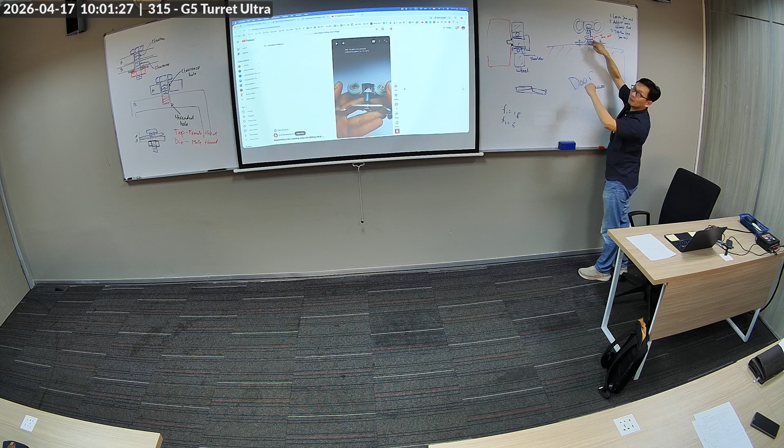So the jam nut actually presses the threaded bolt into the bracket, so it's now locked. So the purpose of a jam nut, and this is the reason it's thin, is to tighten itself against something else.

So the main thread does not rotate anymore. So if you only adjust the height of your door and it lifts up, but you don't jam it with the jam nut, over time, things moving, things rotating, it drops again. So in order to stay on the height that you want, you have to jam it with this jam nut. That's kind of a long explanation for the jam nut, but that's what it is.

Nylon insert jam nut. So again, you put the nylon here. It's tight, more difficult to rotate, intentionally so, because they put a plastic piece.

Wing nut, you can just use your fingers, no tools. Cap nut is just something aesthetic because the threaded rod usually sticks out, and if it's on the outside of your product, you want it capped. Something similar like a cap nut.

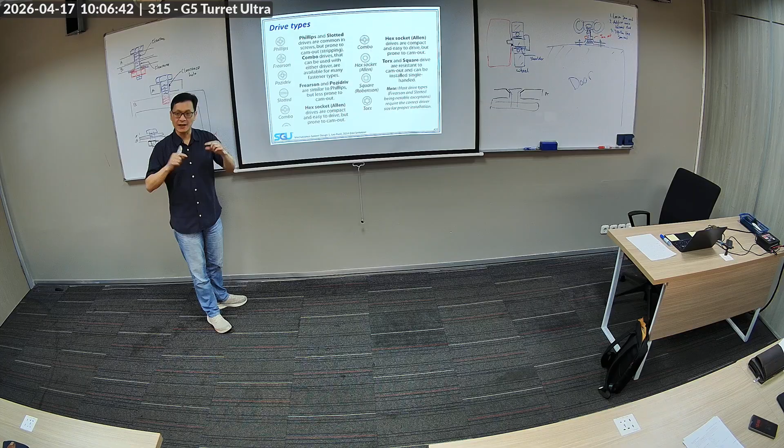Combo. Now, these are a bit special, and you see this in tiny, tiny screws — we're talking like M2 or 2mm screws or even 1mm screws. What's special about them is they are resistant to coming out. Because if you see a Phillips head, if you cut through a Phillips head, it is actually — say if this is a screw, okay, that kind of screw.

The Phillips head is actually cut at an angle. So as a result, when you tighten it with a lot of torque, your screwdriver will pop out, and this head will be damaged. It will be rounded.

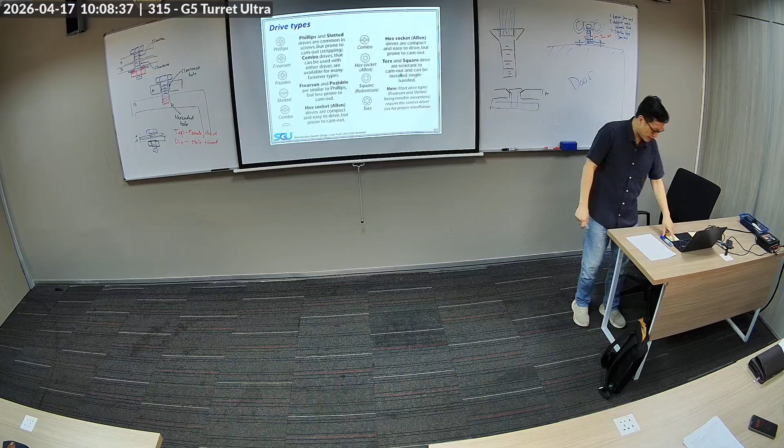You have a question? Yeah, why do they make a Phillips that's straight cut instead of this? That's a good question. I mean, tradition—that's how we've been doing it, and that's the cheapest screws out there.

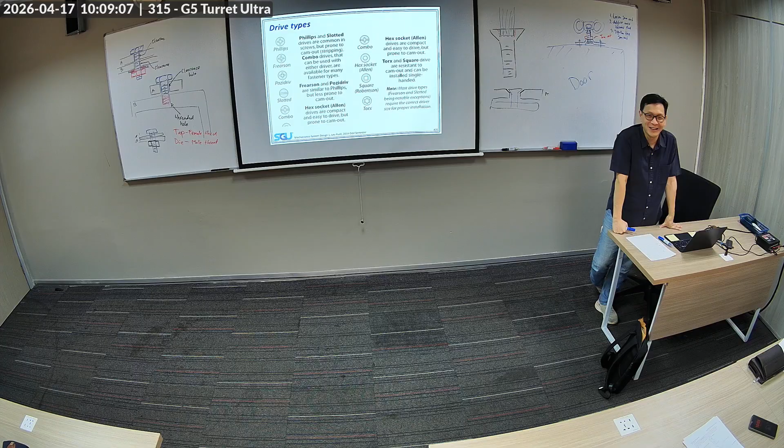These are newer, and when they say newer, we're talking about 10, 20 years. This goes back like 50 years. So it's just tradition. If you deal with German cars, they do this a lot—Torx. I hate it because you don't use common tools, but it is better. You have a lot of surface to bite on, so yeah, more expensive fasteners. Just tradition, that's how we've been doing it for decades, so we'll just use that.

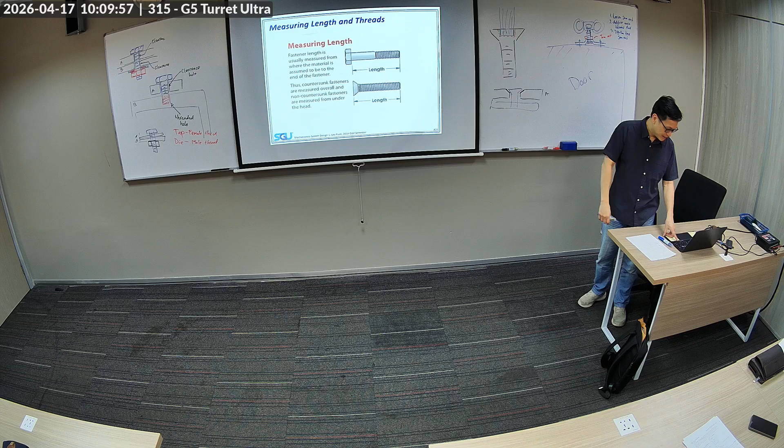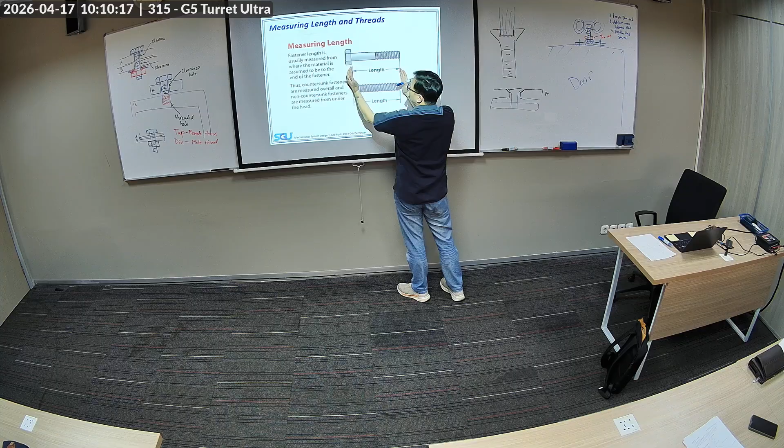The definitions of length for fasteners is different if you have a head sticking out or the head is in. So for countersunk fasteners, this is the length. The bolt with a head like this is the length.

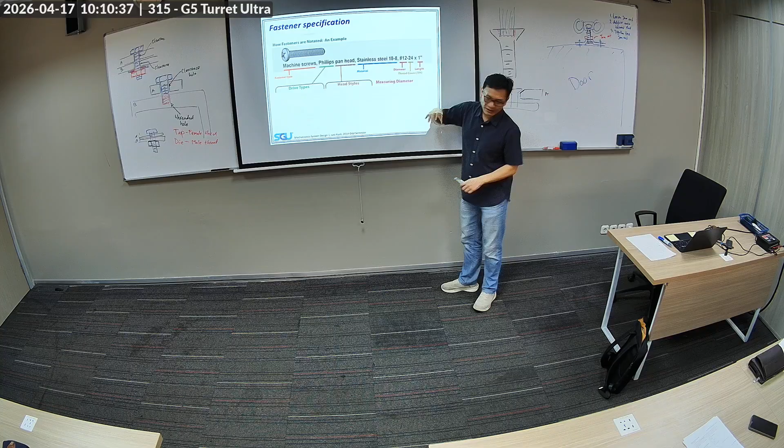Now let's talk about how they are defined. This is an inch thread. I think I have a different slide for this—hold on. Okay, we'll get to the sizes.

But before that, coatings. We have coatings on bolts to do several things. First, appearance, so it doesn't rust, and corrosion—corrosion and appearance kind of go hand in hand, right? A rusted bolt just looks ugly. It also reduces friction, and this coating helps with friction too. If you have less friction, you have less preload scatter, and we'll talk about preload a little bit later.

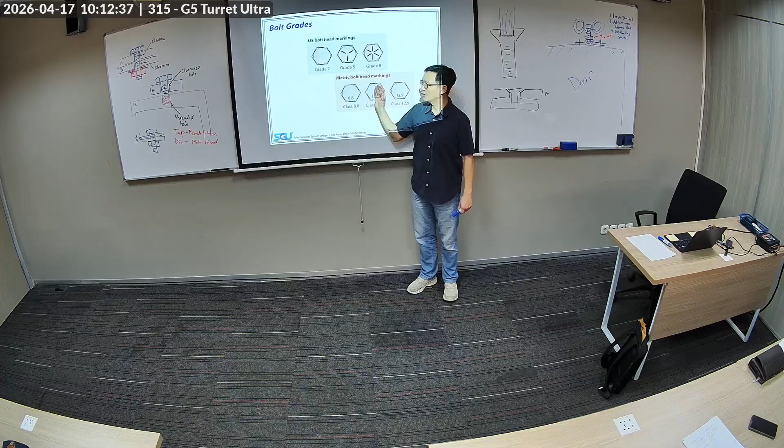Now, if you look at a bolt, you've got multiple threads engaged, right? But actually the load is not carried on the threads equally. So these are the load percentages of each thread: 34%, 23%, 16%. What's that total? 60-something, so 73%. That's the load actually carried by the first 3 threads.

So if these are multiple threads engaged here, the first 3 threads that are engaged are carrying 75% of the load. And so if you ever over-torque a bolt and strip the thread, you'll notice that the thread that's stripped is not the bottom—it's actually the one on top, because the top 3 threads carry the majority of the load. So that's the first consequence.

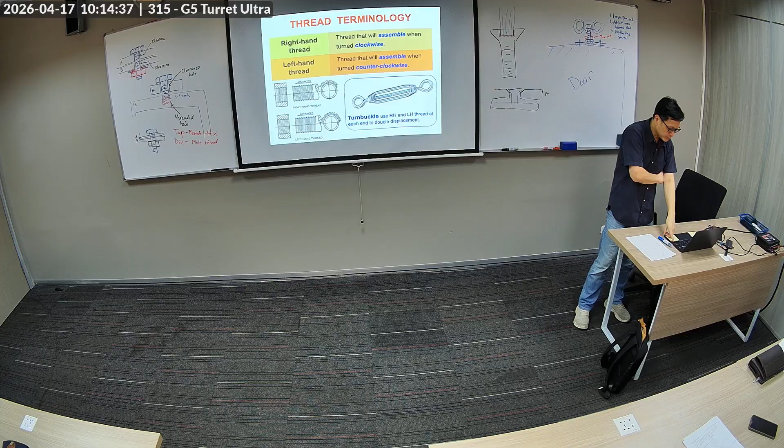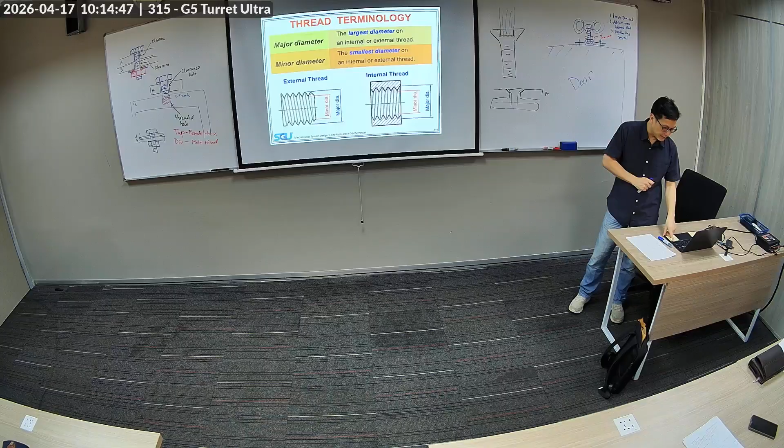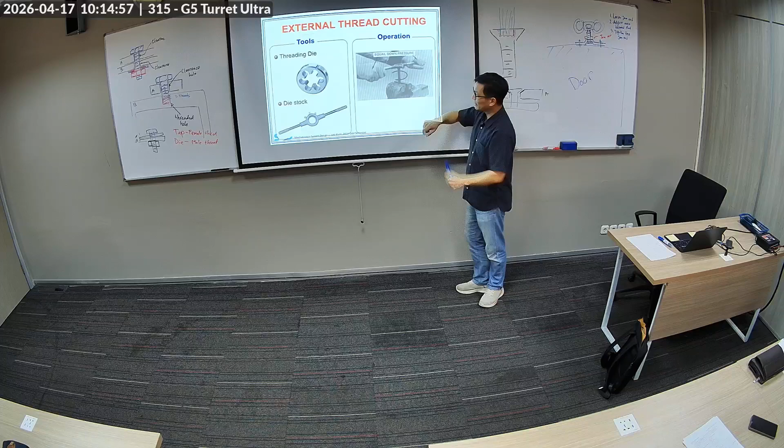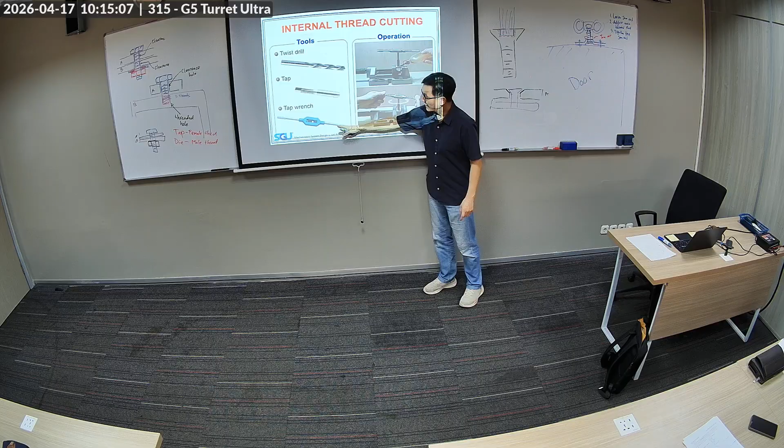These are the tools. This is the tap, you know, you tap it. This is a tap wrench. So first you drill, and then you tap to create the female thread.

The way you check a thread is using what is called a thread gauge. You want to check the dimension of the thread. Basically you fit the thread gauge into the threads and see which one matches.

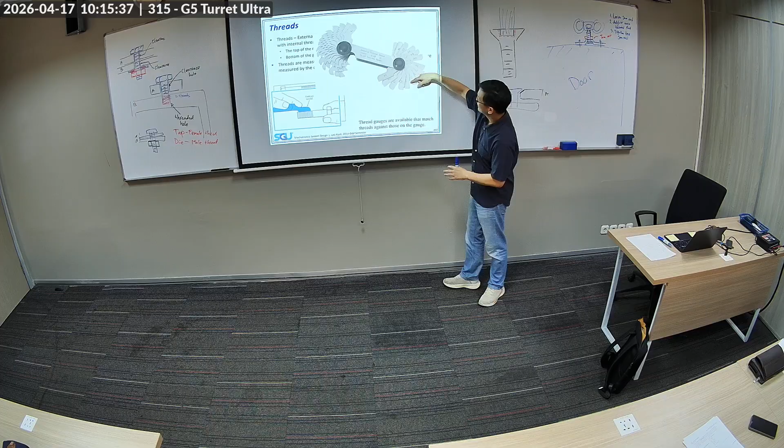This thread gauge is just a bunch of thread marks, thread cuts. So it's like that, and then you try to match it and see which one matches. I'll bring you some samples tomorrow or the next time I remember.

This is how you define a thread. The nominal size is the major diameter. So you have a bolt, right? You have these threads. The major diameter is this.

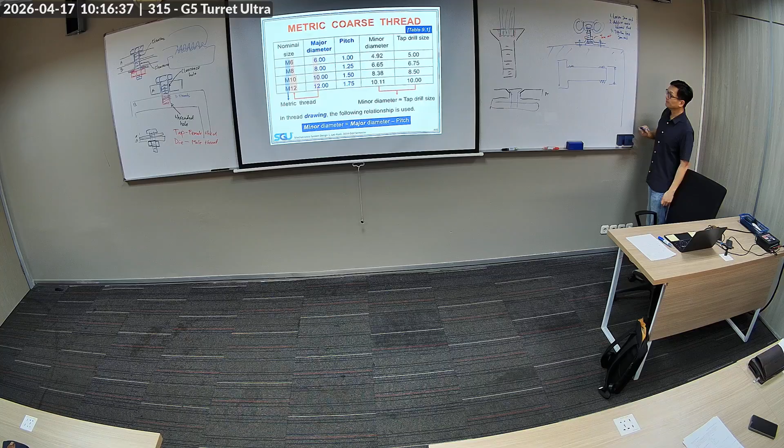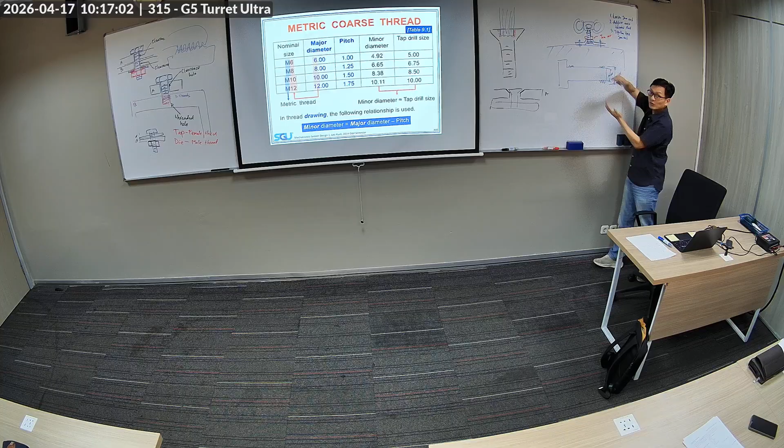On the outside of the thread, because you have the inside, right, the cut - this is called the minor diameter. This is the major diameter. So the minor diameter is the root. The major diameter is on the crest, which is the top of the mountain. The minor diameter you measure at the bottom of the mountain. The pitch is the distance between these two crests. So this is called the pitch.

So the smaller the pitch, the finer the thread. Lebih halus, right? It's fine. Obviously, a smaller screw will have a smaller pitch. It's just natural. So that's the pitch. For the same major diameter, you can have coarse or fine.

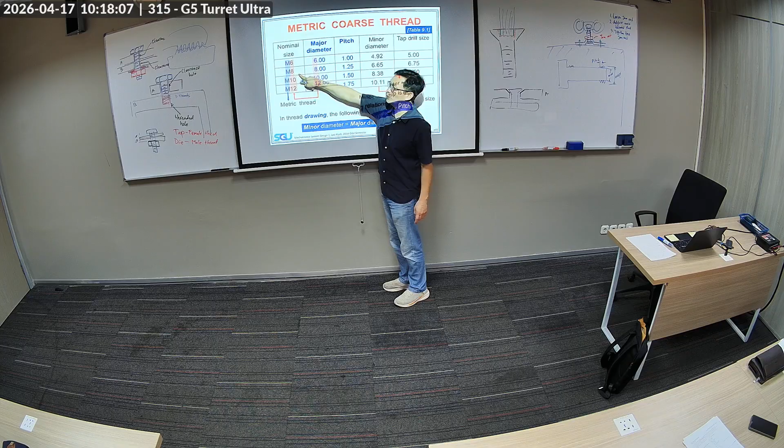So this is a coarse thread. An M6, a 6 millimeter screw, will have 1 millimeter pitch for coarse thread. Let's look at M8. An 8 millimeter screw or bolt has a 1.25 millimeter pitch for the coarse, but for the fine, an 8 millimeter screw or bolt will have a pitch of 1 or 0.75. So it's tighter together.

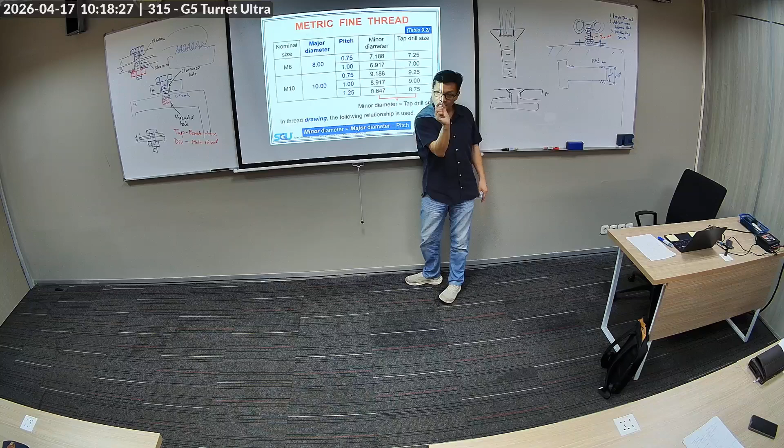Same major diameter, but one is finer, the other one is coarse. So coarse is like they space apart. This is the fine one.

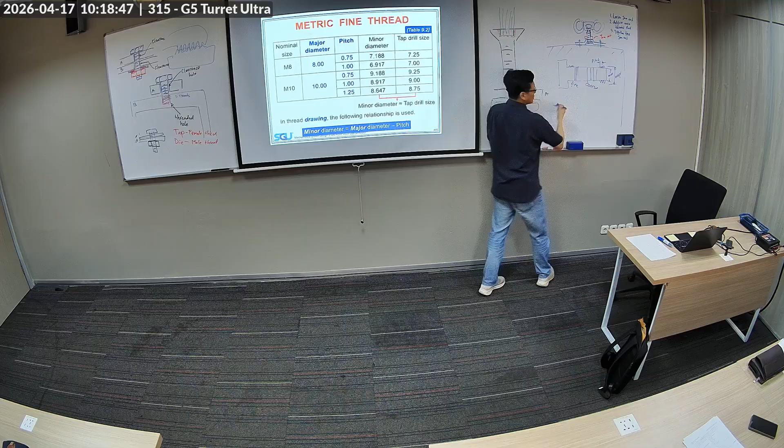So you actually have two types of thread specification. One is an inch style or inch unit, and the other is the metric unit. So with an inch unit, the writing is different. Here we deal mostly with metric, but I think you also need to know how an inch bolt is specified.

A metric bolt is specified M6-1. This is the thread pitch, this is the major diameter. For an inch bolt, quarter inch, 20 - now what is this 20? It's the number of threads per inch. It's different from the metric bolt.

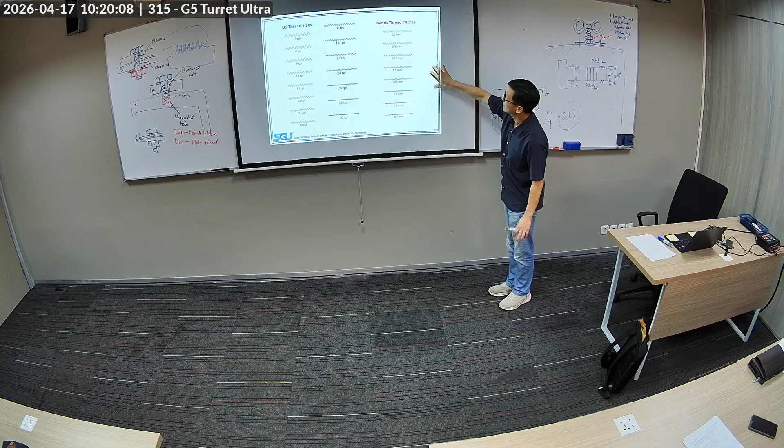So this is an image of the threads, right? Metric thread pitch is the distance between the two mountains. So a metric pitch is defined like this - if it's 1 millimeter, then it's 1.0 millimeter distance from the two peaks of the mountain.

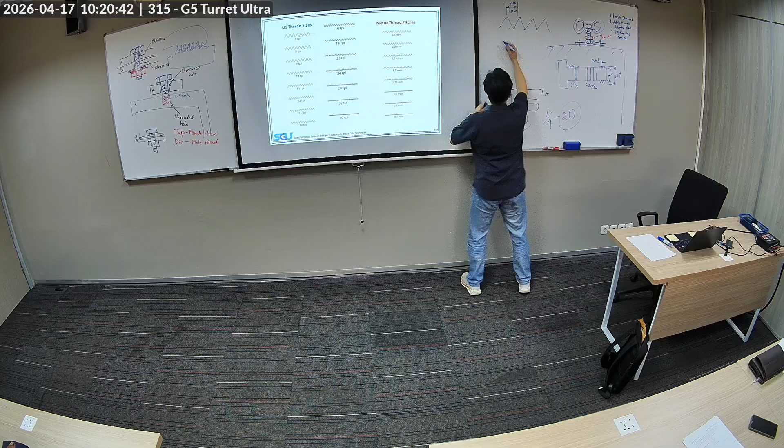But a US bolt, an inch bolt, is specified in terms of threads per inch - in 1 inch, how many threads are there. So a 20 TPI means that if you take a bolt like that and measure in 1 inch, you have 20 threads.

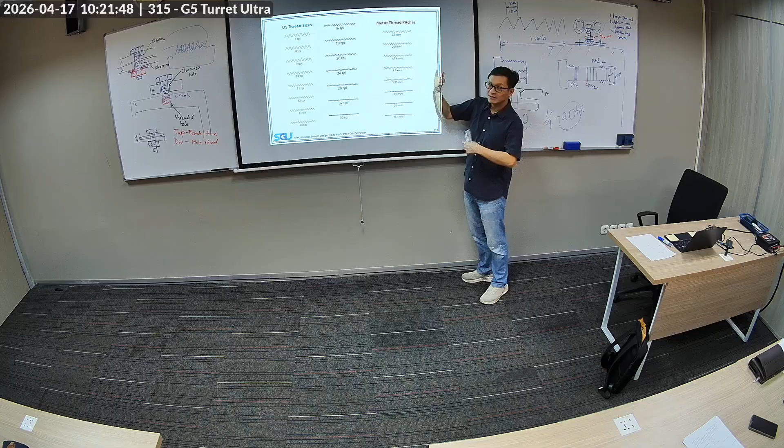So which one will be a finer thread between 20 and 24? The bigger the number, the finer it is - lebih halus, right - because there are more threads per inch. But in a metric thread, the bigger the number is the coarser, or put differently, the finer thread has a smaller number, because it is measuring the pitch, not the number of threads in 1 inch or a specified length. Got that? Okay, so it's the opposite and it's written differently.

So the letter M signifies that it's a metric thread. 6 is the major diameter and 1 is the pitch. For an inch bolt, quarter inch is the major diameter and 20 is the number of threads per inch. So a metric bolt is like this, M12, 1.75 - this is the pitch. You don't have to remember the rest. This is the majority of the thread specification.

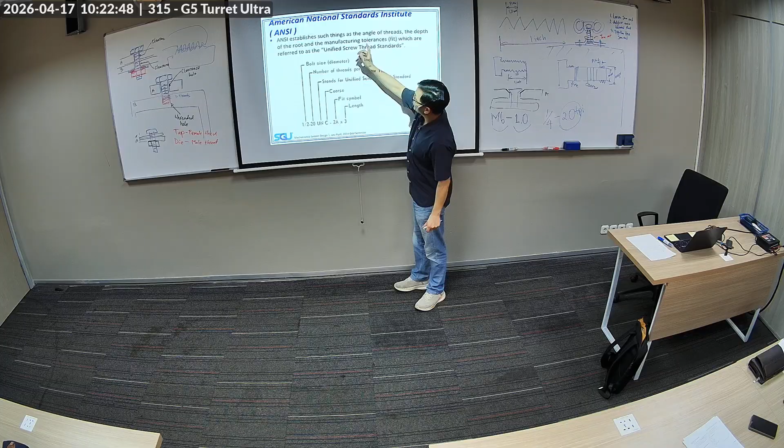A US bolt for ANSI is half inch, 20 threads per inch. And you cannot find random thread specifications, right?

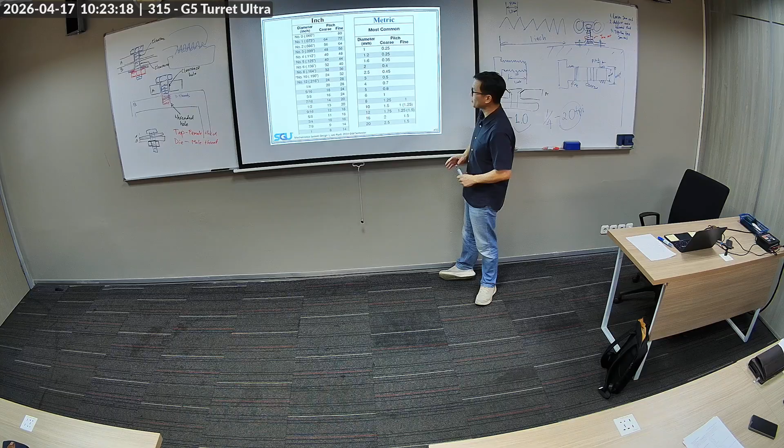So a 6 millimeter bolt is most commonly 1 millimeter pitch. You cannot say, I want a 0.9 pitch, okay? It doesn't exist. They make this in mass production, so you've got standard ones.

Now, the smaller bolts do not come in fine pitches, only the bigger ones. So starting from 8 millimeter, you will have a fine thread version of the bolt.

All right, we'll get into the calculation for the strength of the bolt.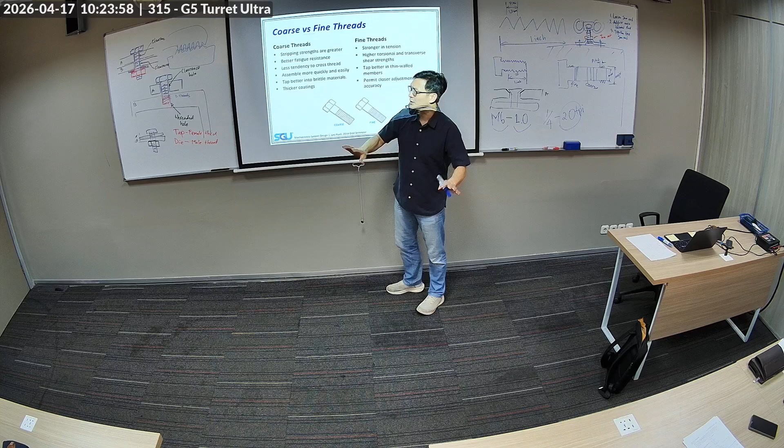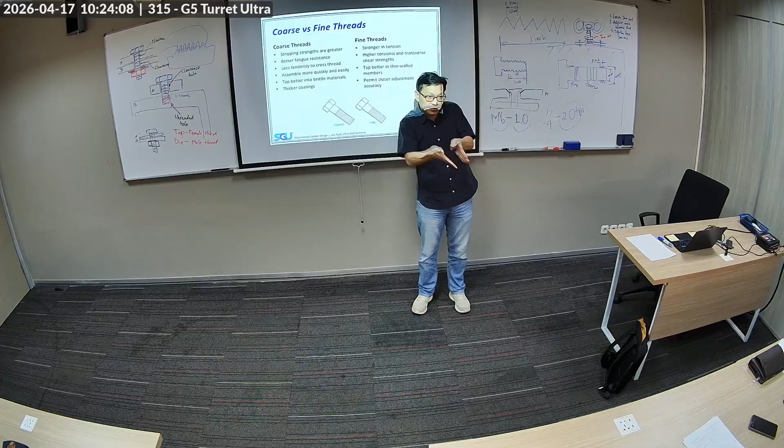Let me just summarize between coarse and fine. There are different strengths and weaknesses. The coarse thread is the most common, so in most cases you'll be using coarse thread. It has greater stripping strength, better fatigue resistance, and less tendency to cross-thread. Cross-threading means when you insert a bolt at an angle and tighten it wrong, you damage everything - I've done that. With fine pitch, you can cross-thread more often.

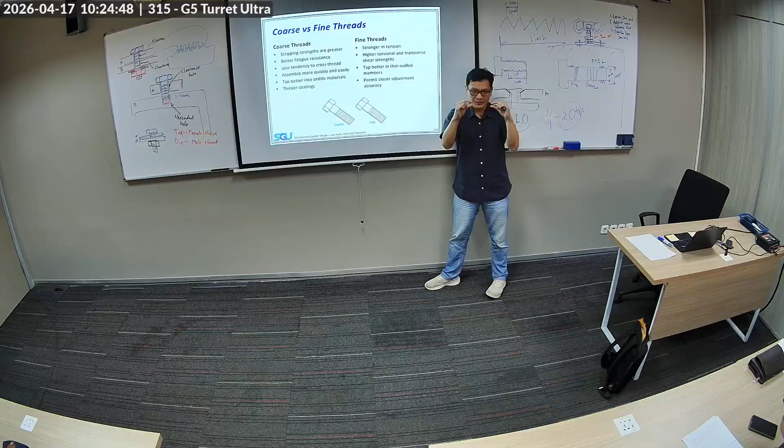Coarse threads assemble quickly and tap better into brittle materials - so these are the main strengths. Fine threads sometimes are used because they are stronger, with higher torsional and transverse shear strength, and are better in thin wall members. This is the main reason you use fine threads: when your plate is thin, you don't have room for many threads. If your plate is thin, that's why you use fine thread, so you can fit at least 2 to 3 full circles in the specified thickness.

It is mainly used for adjustment - sometimes you use these bolts for adjusting a distance, like the tensioner in a belt situation. So that's probably the reason you will use fine thread.

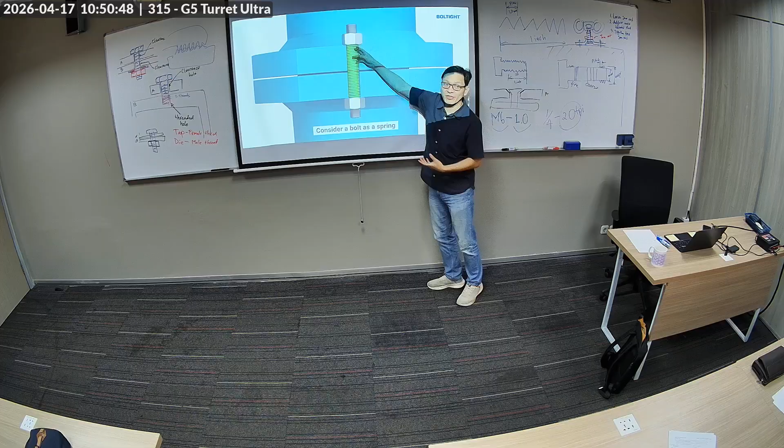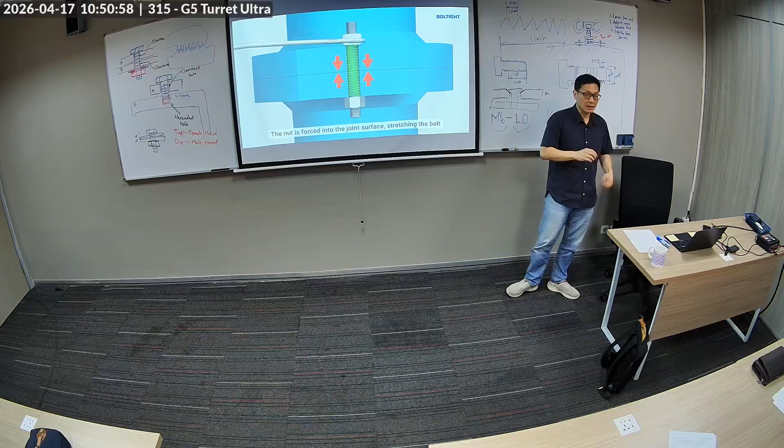So this is the animation that I was trying to show. So when you tighten a nut and a bolt - well, in this case you have two nuts and one threaded rod - when you tighten it, you can think of the bolt actually as a spring. You tighten it, and if you tighten these two, the bolt actually lengthens and acts like a spring. This results in a clamping force.

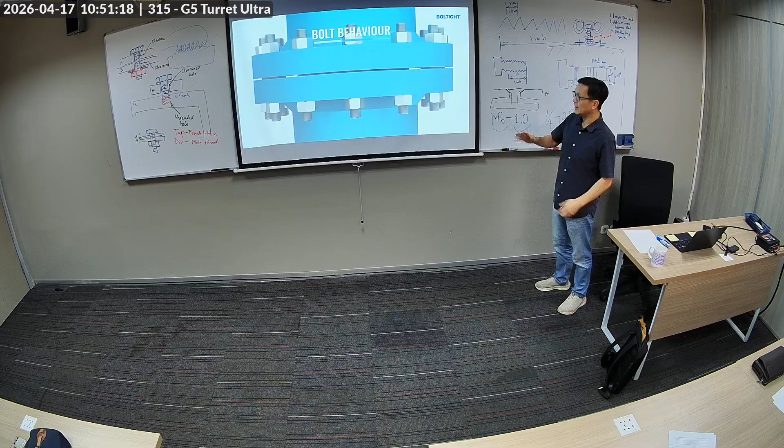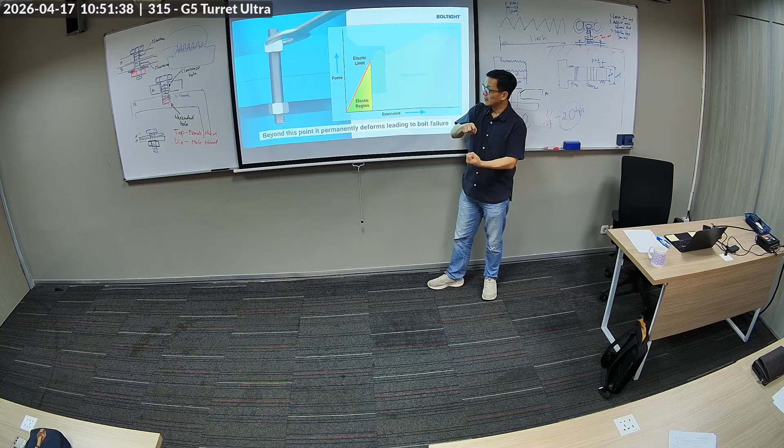Let's look at it again. So the gap is obviously exaggerated. When you tighten it, the bolt actually stretches along this elastic region. If it goes beyond the yield, then you damage the bolt, so we don't want to do that. This is deformation, permanent deformation. Okay, does that give a good picture?

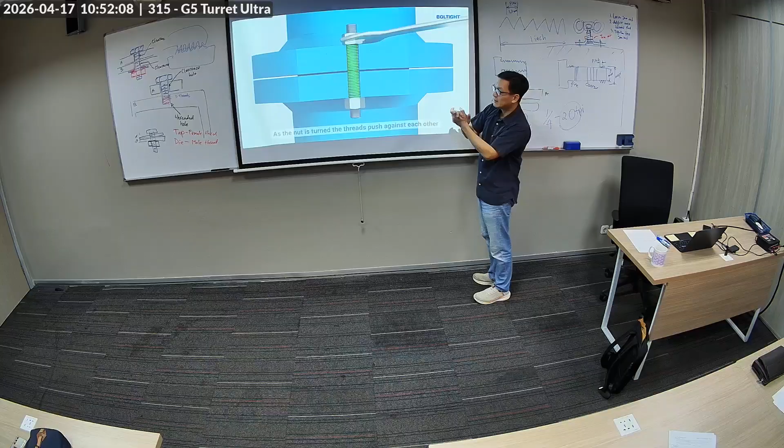Yeah, so again, the point of a bolted assembly is to close this gap and not let it separate. If this is a pipe, then having a separation means leaking. So the point is to assemble those.

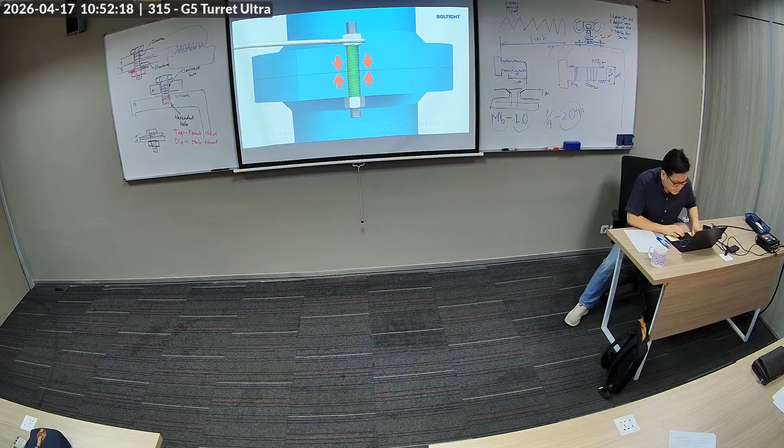Now here is a more detailed animation about the clamping and the stretching. So consider two plates that are being clamped with these fasteners, with a bolt and nut assembly. So this is - you get rid of the rest and just focus on the sleeve here, right?

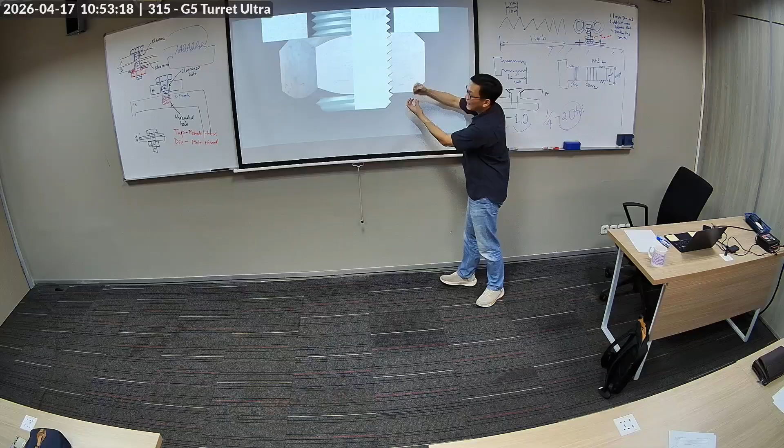Notice there is some gap between the threads, right? There is some gap. As you tighten it, the gap will be taken up, okay? And as you tighten this, you are actually pulling on the bolt.

This is the flow of force. You see that the first three threads take up the majority of the load. That's why you don't need like 10 threads engaged, right? You only need 5, maybe 6.

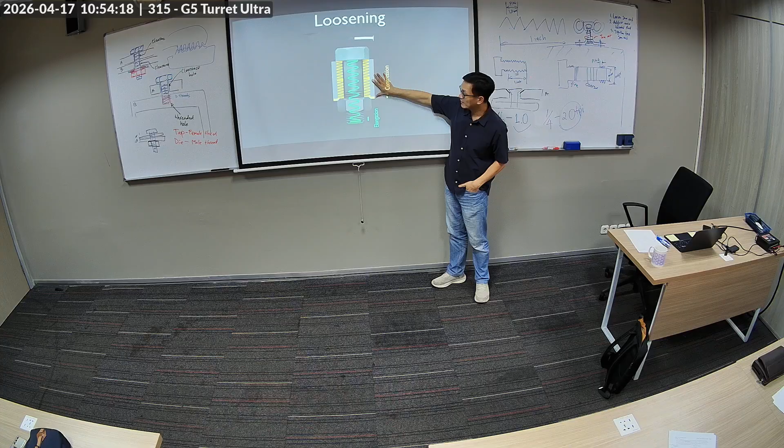As you tighten it, the bolt actually lengthens. So think of it like a spring, you're clamping it with a spring. The green one is the elongation of the bolt. The plate, the two parts that you're assembling, is actually in compression, right? So the green spring lengthens, the yellow spring compresses. If we represent these two as two springs, this is what happens when you tighten a bolt.

So determining how much you tighten the bolt becomes a question of how much we want to tension the bolt, right? Because when we tighten it, we are stretching it. And so the question becomes how much stretching is acceptable to the bolt before it breaks, because we want to maximize the clamping, right?

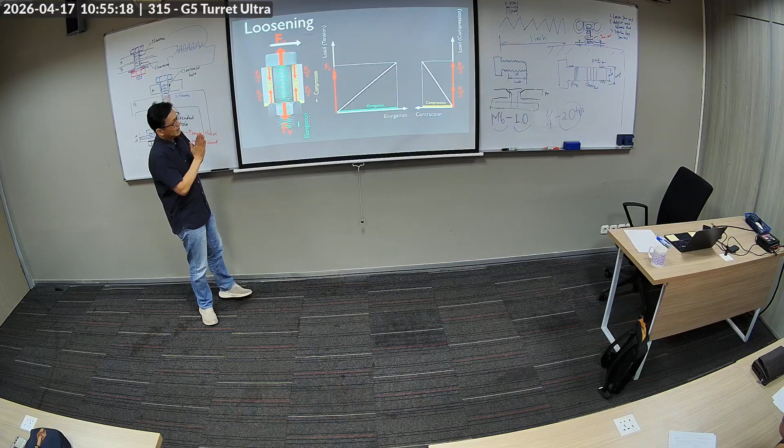And this is just a stiffness diagram of the bolt and the two plates. So let's say you are sandwiching two plates together. This is the stiffness of the joint, and this is the stiffness of the bolt. So as you tighten it, you go up this curve, and then eventually you're going to meet, this is your tightened position.

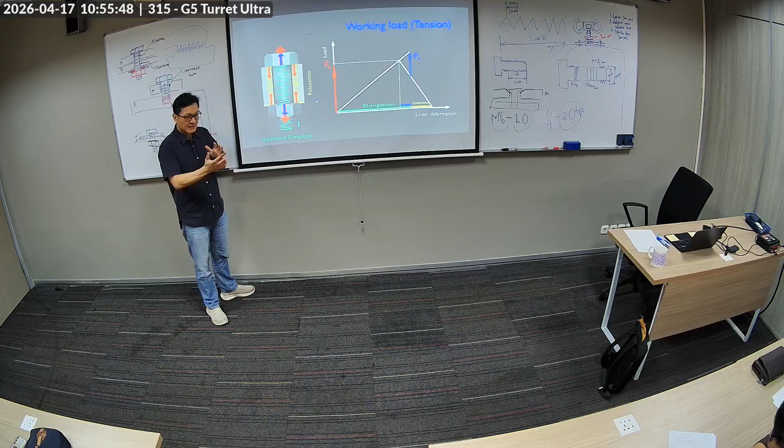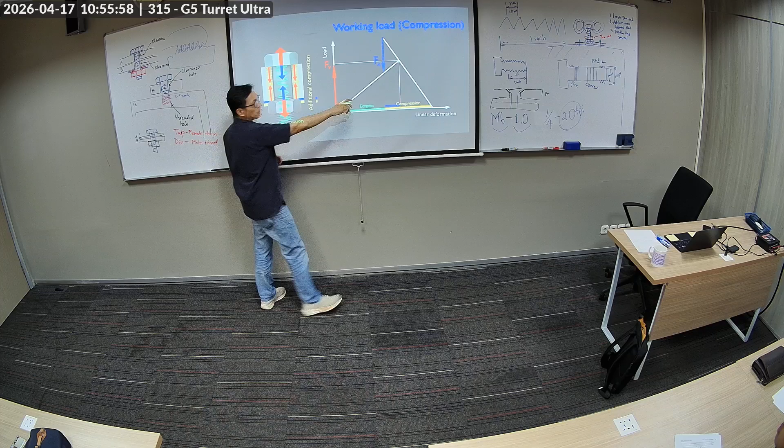And when you pull on the plate, this blue one is no longer tightening, but as the assembly is under load, it's going to try to separate, right? So the separation or compression will apply a load, and the capacity of this load will depend on how much you tighten it. So this is kind of a mathematical representation of what happens when you tighten a bolt and the bolted joint is under load. However, it's probably easier to imagine using this illustration.

Okay, this is an illustration of what a bolted joint does actually to your assembled part. Think of a spring gauge, you know, where you have a hook here, and then you can pull on the spring. So you're going to pull on this spring with a preload of 1,000 pounds or 1,000 newtons, okay? And then we're going to put a block in between these and let go of the preload. What happens?

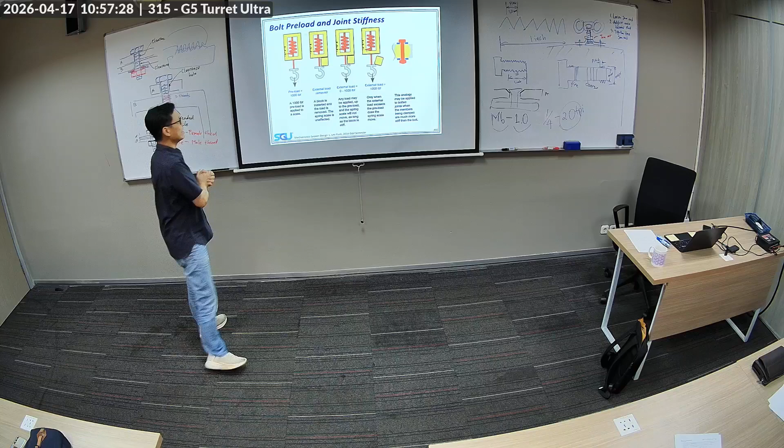The block is being held in place, right? Because I pulled with 1,000 pounds, put the block here, and let go. So the block is constantly being compressed with how much? 1,000 pounds, obviously. So it's always clamped, right?

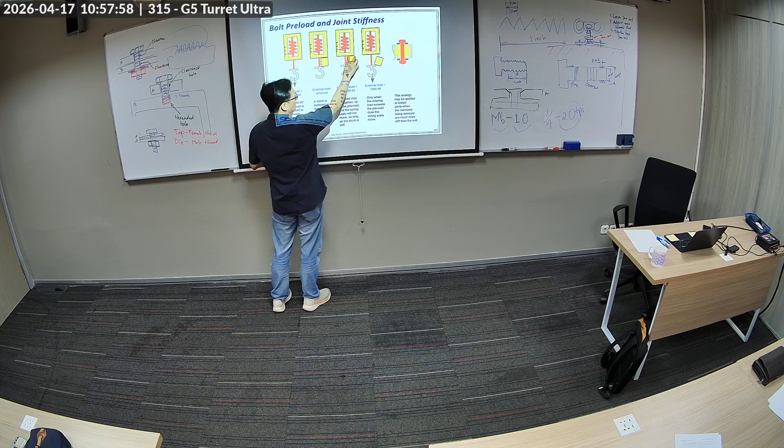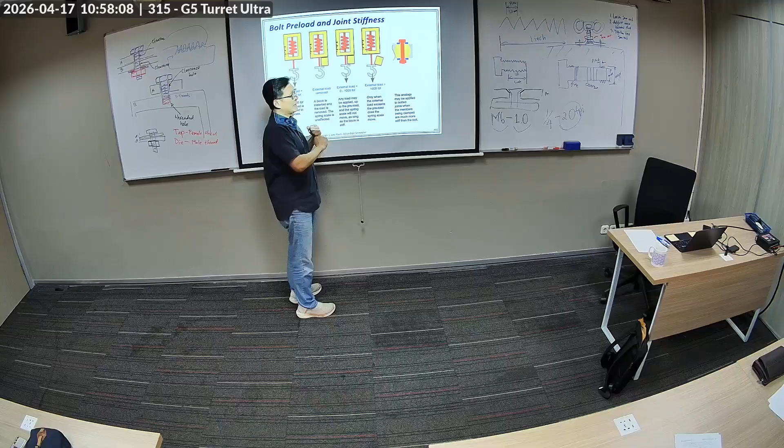Now, let's say the block is trying to break free from the clamping. How much does he have to push in order to get out from the clamping? Yeah, 1,001, right? So if you apply a load on this block, let's say the block tries to open it with 700 pounds, then it's still clamping, right? The only way it falls out is when the external load on this block is 1,001.

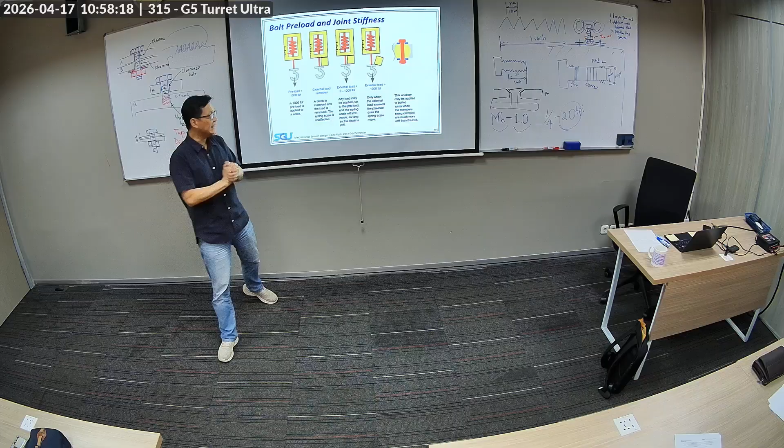So this gives you an idea that the preload in a bolted assembly is the key to the strength of the bolted assembly. I know it might make simple sense, but a lot of people don't realize that how much you tighten a bolt determines the load that you can hold. If you just tighten it slightly, visibly it seems like it's clamped, but it can break free easily because you're not tightened enough. So the question becomes, how much do we have to tighten the bolt?

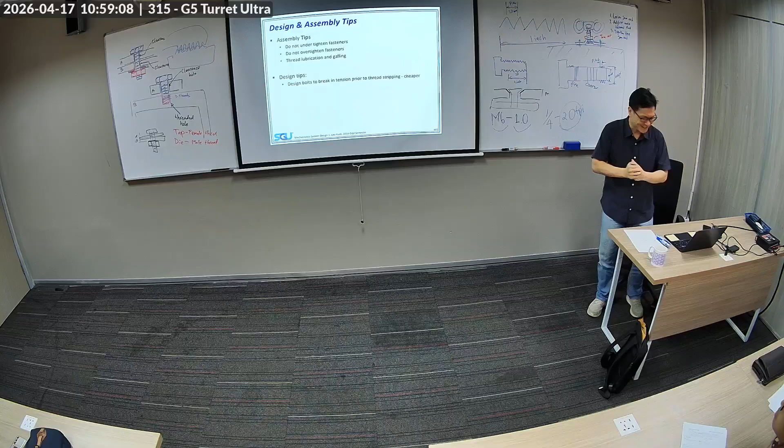And practically, you're going to use what is called a torque wrench. Who has used a torque wrench? Yeah, obviously. But a torque wrench is a tool that actually measures how much torque you have applied. It actually clicks.